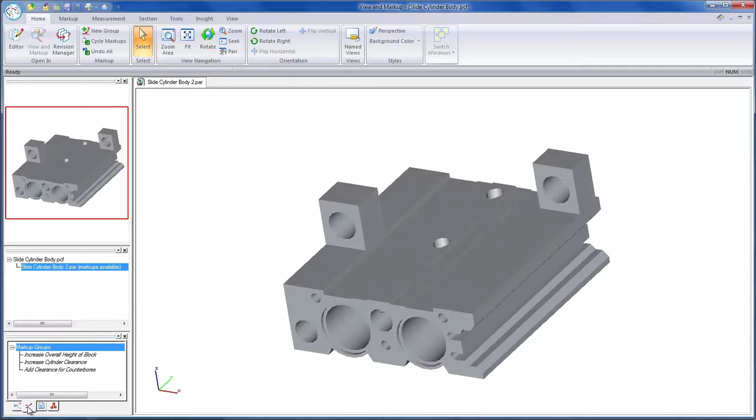Design intent is the intelligence we as designers build into our CAD models so that they'll change predictably. The issue is, in a history-based CAD system, nobody knows what the intent is other than the original designer. This could prove to be problematic if the designer is no longer available or doesn't remember how the part was put together. To illustrate the problem, we've been sent some markups to make to this old part.

For our first change, we need to add some extra material to the slide in order to create additional clearance between features. We have instruction to change our slide body to an overall height of 31mm. The second change is to increase wall thickness between the cylinder slides and the cutout to 4mm, as we're seeing some problems with deformation. And finally, we need to add at least 2mm of clearance between these counterbores, as our new manufacturer is reporting a blow-through risk.

First, we'll attempt to make these changes like you would with most any other CAD system, using a history-based approach. Then, we'll make exactly the same changes using Synchronous Technology. So first, history-based, and to help compare, let's set a timer going in the top right.

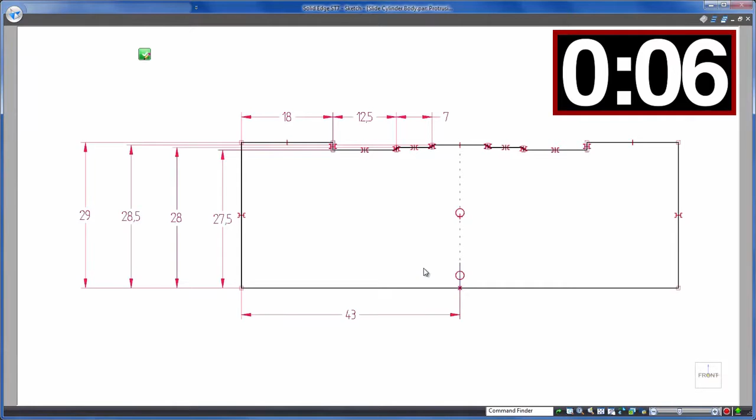So for the first edit, we click on the model to edit the sketch of the highlighted feature, assuming this is the correct feature. Luckily it is, and we're also lucky that we have a fully defined sketch with a dimension of the geometry that we need to change. We'll change this to 31mm as required, the sketch is updated as we'd expect, and then rebuild the model.

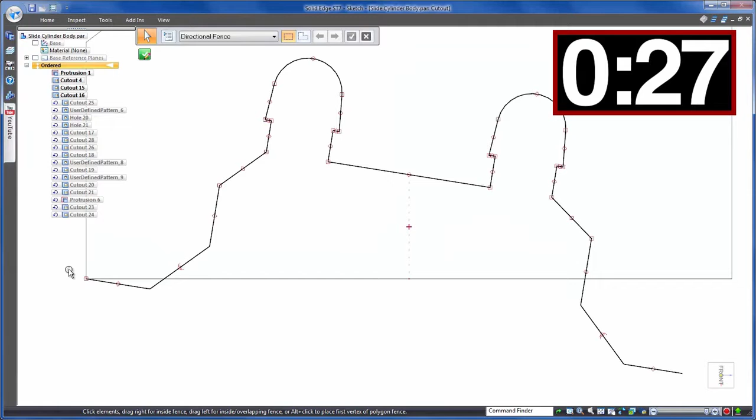We have a problem. Due to inappropriate design intent, this cut on the right has shifted, so we need to go in and fix this by editing the sketch relationships. Only a minor issue there to resolve, 34 seconds of editing, but let's do the same revision using Synchronous Technology.

Timer restarted in the top right, and for this same change, all we need to do is place the required dimension in 3D, no sketch work in sight. Solid Edge has recognised the design intent of the geometry here. It sees that there are quite a few faces to keep in line. However, as you can see, we can intervene on the fly if we wish. Solid Edge was right the first time though, and furthermore, notice that we're able to keep the model symmetrical. No issues about fixed origins or coordinate systems, 22 hassle-free seconds.

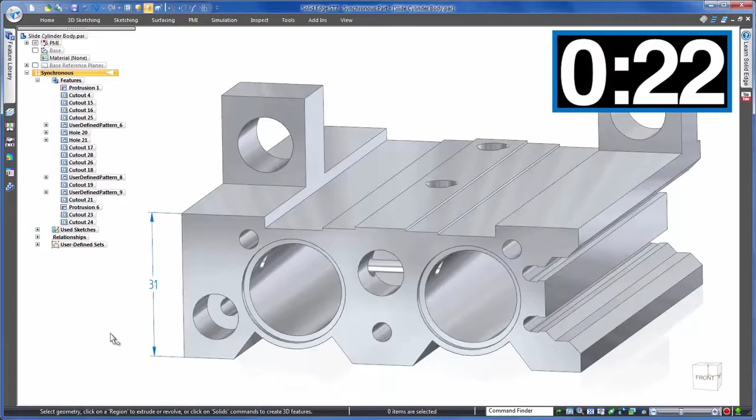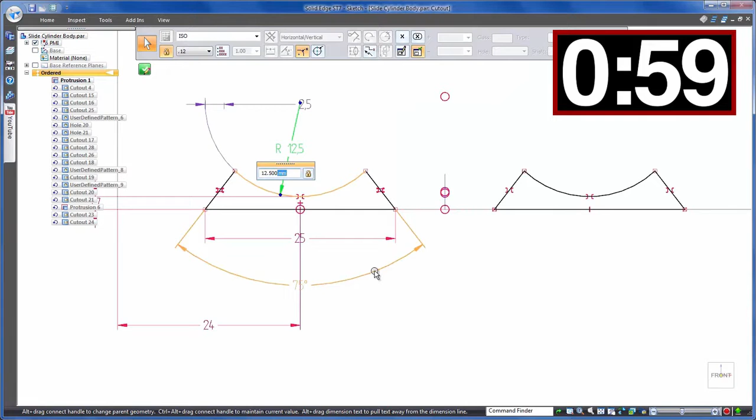Back to history-based for the next change, and before we make any edits, we need to find out how much material we currently have between the cylinder and the cutout. Measuring it finds it to be 2.5mm. We need to make this a total of 4, so we'll add 1.5mm to the radius of the cut. Again, we'll go in and edit the sketch of the feature and use Solid Edge's ability to enter equations in the dimension box to simply plus 1.5mm.

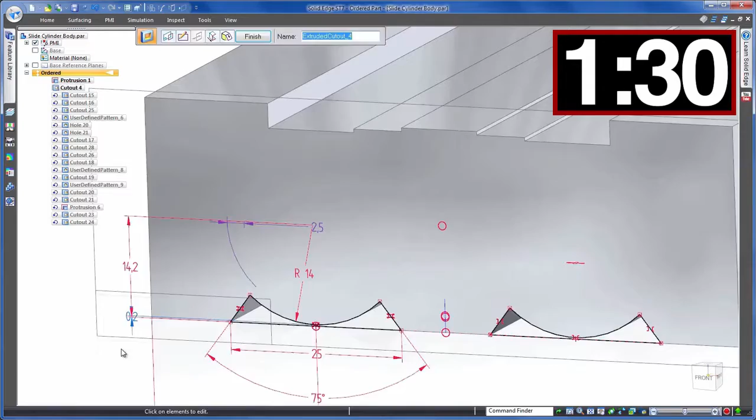Rebuild the model and it's clear that the original design intent wasn't set up for this type of change. We now have interference with our slide positioning holes. So let's undo that change and go back to the sketch to correct the design intent. We'll speed through this to save you falling asleep. Okay, sorted, and we're at 1 minute 34 seconds.

The same change using Synchronous Technology, and dimensioning the two radii here isn't limited to just taking a measurement. Instead, we can immediately type in the 4mm clearance value required. As for design intent recognition, not only does Solid Edge allow us to add material rather than shifting the cylinder slides up, but it also recognises that we'd want the other side of the model to change too, as it's symmetrical.

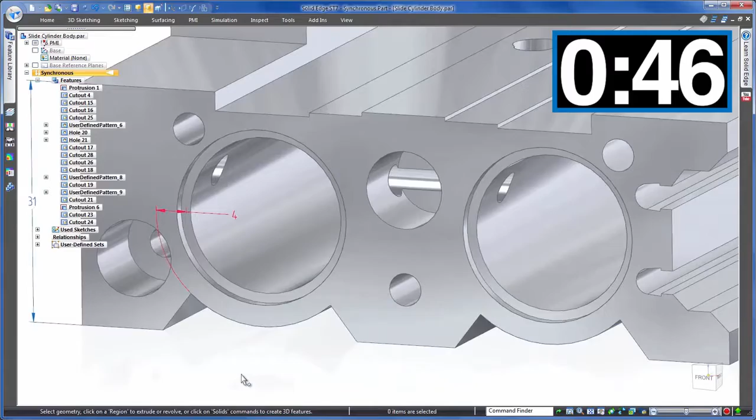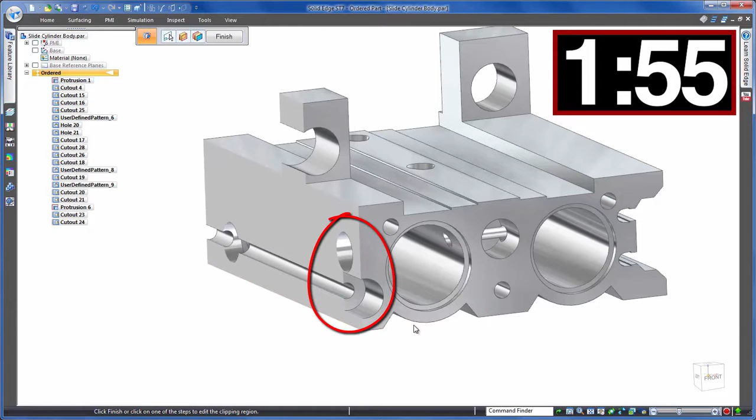Now for our final revision, and back to a history-based approach for the last time. In order to get a better idea of what we're working with, we'll create a section view through the model so that we can get a better understanding of where that blow-through risk is. Okay, here it is. So we'll be editing these two counterbores, and let's take the lower one first. We'll go into the sketch and modify the dimension that's controlling its position, subtracting 1mm. Again, we'll use the equation in dimension box method for ease.

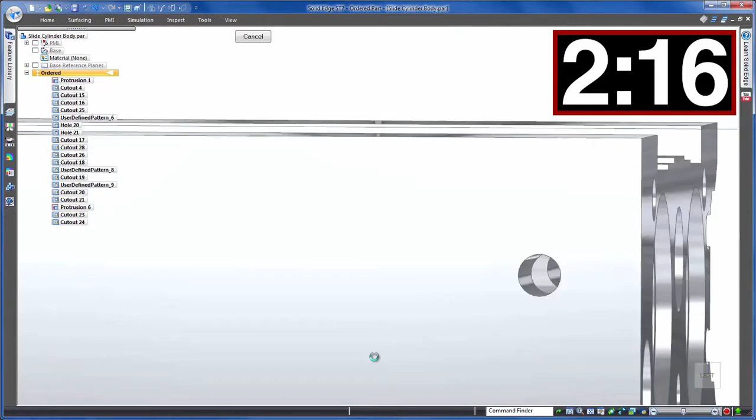We need to do the same with the top counterbore to total our required 2mm clearance, but repeating the same steps, notice that this wasn't created in the same way as the previous. Instead it has two cuts, one concentric to the other. These sorts of frustrating situations are often run into in history-based modelling. Design intent may not be what you'd naturally expect. It's all down to the original decision and creation. Another fix required.

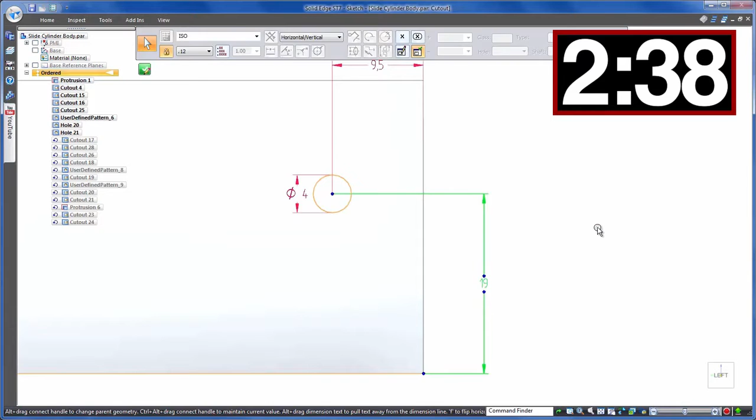Re-examining our part to make sure everything is how we need it. Notice that we now have an issue relating to the rear counterbore. It doesn't line up with the front counterbore we edited earlier. Again, the setup of the original design intent means that the model hasn't changed as expected, so time for another fix. We'll speed this one up too.

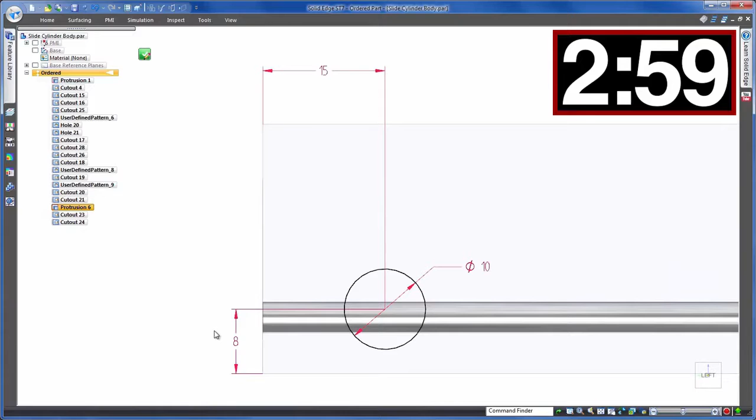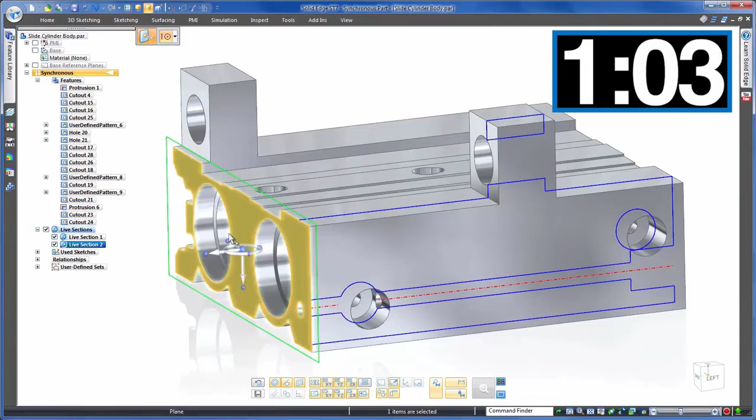And this same final edit using Synchronous Technology, we'll remember the section view that we used in our history-based approach. Well, check this out. Synchronous Technology automatically creates sketches at that particular section, allowing us to use those to drive the model. And as it's that easy, well, let's add 2 sections. We can even hide our part so that we're left with an unobscured view for our required edits.

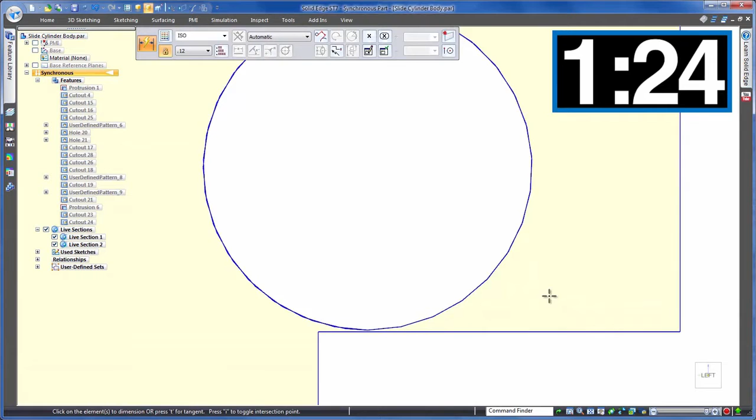We can then simply drag this profile to see how the design intent is being taken care of, which of course is modifying all of the solid geometry in the background, or use precision tools to make the edits. We use the same dimension tool we've been using all along to add 2mm, or round to 2, as we can now more clearly see the overall geometry. But what about that rear counterbore? Well, no problems here. Solid Edge has recognised the design intent of keeping these aligned, and of course you have the freedom to intervene if you wish.

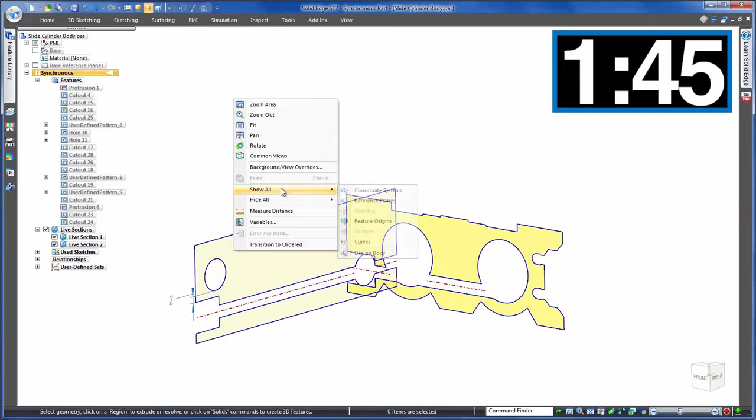All changes done. Let's see how the times compare. 3 minutes 37 seconds for history-based and 1 minute 45 seconds for Synchronous Technology. Both small numbers for this simple example, but that's half the time using Synchronous Technology. And it's not just about time, it's the removal of the guesswork, the tiresome interrogation and modification of the original design intent. Synchronous Technology in Solid Edge recognises and maintains design intent on the fly, of course with freedom to change, allowing for sensible and predictable edits.